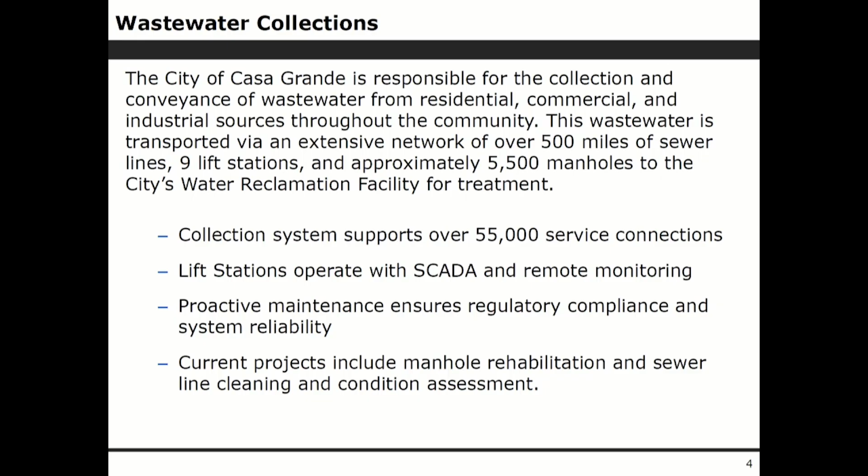Our wastewater treatment plant, as it currently lies, is 18 million gallons a day. We are just completing a conversion—we were at 12 million gallon a day capacity. We're going to be finished in the fourth quarter of this year with our expansion to 18 million gallons a day capacity. And we have a future capacity of over 50 million gallons a day at that location if we choose to continue to treat in a centralized location for Casa Grande.

We do have other opportunities, and we evaluate that on an ongoing basis. In 2024, we treated over 2 billion gallons of waste that came in from our residents and our industrial users, and again, we produce that A+ quality effluent.

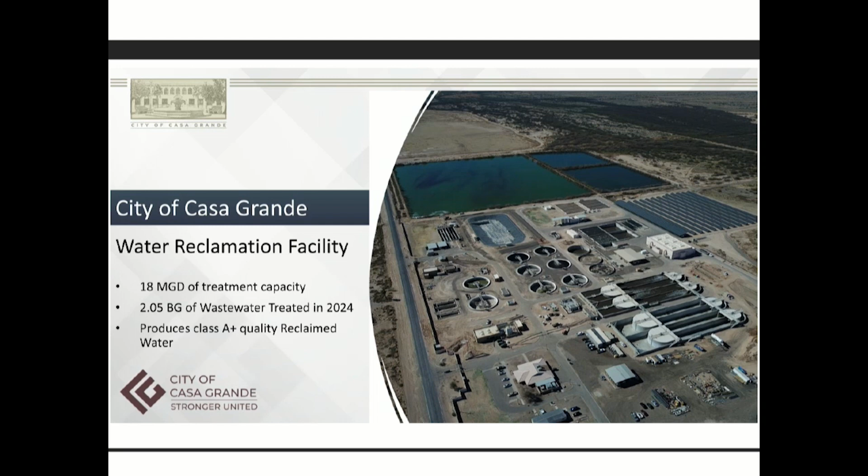We have 12 certified operators through the Arizona Department of Environmental Quality that work at our plant. Two of those are grade 4, the highest grade you can get for certification. And if anybody knows anything about the wastewater industry, finding talented people is very difficult, so we have to really grow from within. So when our maintenance workers come on board, you can see how many of them have their grade 1 certifications, then 2, then 3, and then ultimately 4.

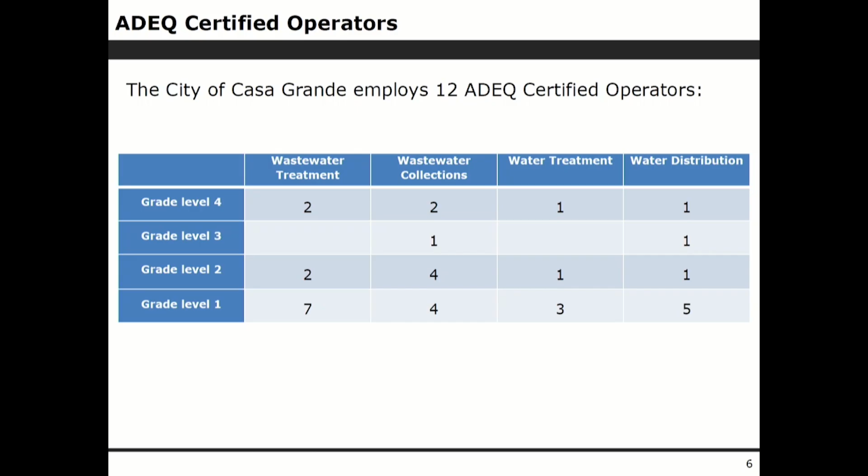So if kids ever thought about what they want to do for a living, if they can get over the stigma of wastewater, it's a great place to grow your career very quickly if you can get through that certification program. When we go out to the schools, we try to promote that as much as we can. But it's difficult to find certified operators—we're very, very fortunate to have the level of operators that we have in Casa Grande.

Then our treatment process. Our preliminary treatment is basically to get any of the difficult debris out of that waste stream. If you have a swimming pool and you picture a rock going into your filter, you can imagine what that's going to do to your impeller. So now imagine all the waste that anybody can send to us, what that can do to our systems in our wastewater treatment plants. So the first thing is to screen that debris out so that we don't have to treat it and it doesn't impact our pumps in a negative way.

And then our secondary treatment is our biological treatment process—our aeration or oxidation ditches. That's where we introduce our micro-environment that we've created, basically our bugs that digest all the nutrients in our waste stream. If you've ever seen our aeration ditches, when I give tours to kids or the folks that come out to our wastewater plant, it's like Willy Wonka's chocolate factory river. That's the process where the bugs work, and we start to digest that waste and get it to a place where we can then treat it through the rest of the process.

Our next process is our clarifiers, and that's where we separate the liquids from the solids. Effluent is the liquid portion of that waste stream. The solids go in their direction, and I'll talk a little bit about how we process those in just a bit. But those liquids are what turns into our treated effluent.

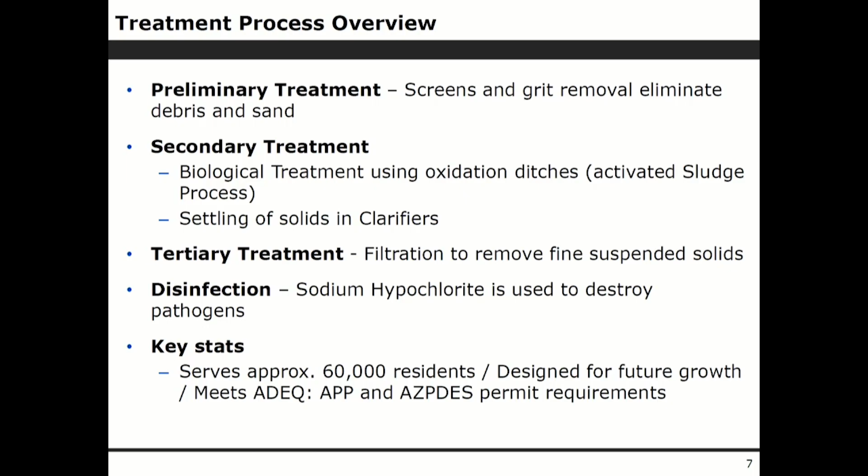Kevin, can I ask a quick question? Absolutely. How often does the state come and do inspections?

Don't they monitor your operation on some kind of regular basis? The best way I can answer that is whenever they want. But we do have regularly scheduled inspections where they come out and look at our daily reports and things like that. But they can come out anytime they want and take a look at our process, and we encourage them to. We like to think we're the flagship of wastewater treatment. I'm sure there are better plants out there in the world, but we do a really good job of maintaining our plant and ensuring we are right where we need to be for regulatory compliance. Yes, heavily inspected and heavily regulated. Thank you. Probably too much, but we really don't have that choice.

This diagram gives a line graph of our different treatment process. The upper process is the liquids, where we basically go through that secondary clarifier where it separates liquids from the solids. We go through that filtration process, then into that chlorine or chlorination basin, disinfection basin, and then we dechlorinate, and then we discharge.

Our solids go through a similar process where we further digest that waste to a point where there's nothing that's going to impact the environment when we get rid of those solids. We currently use that biosolids product, our solids, at our landfill as an alternative daily cover, which is also regulated by Arizona Department of Environmental Quality. So we have a permit to use that solids material out there, and we mix it at a 2-to-1 ratio with topsoil. Landfills are required to have 6 inches of cover every day, and that's a very expensive process, so being able to use this product out there at a beneficial use really helps us reduce the cost to the city and our residents.

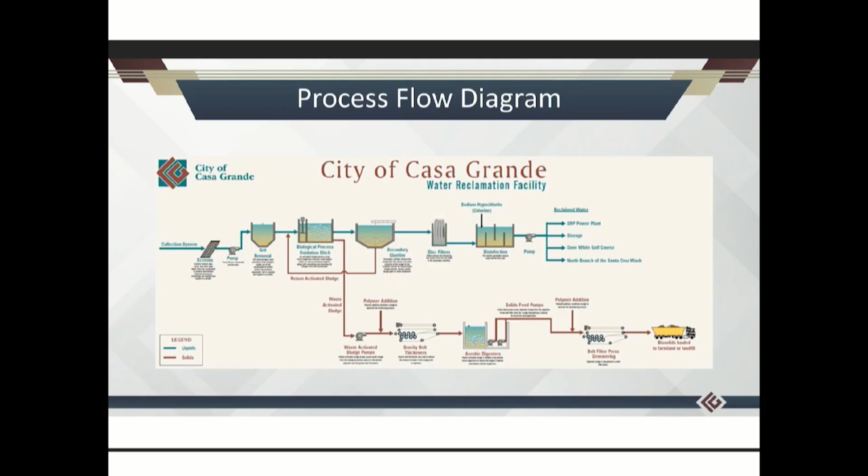Excuse me, ask you a question. Sure. So, because you're talking about the solids, does it work similar to the digester process like they use for dairy cattle? Yes, very, we introduce air to that system. It helps break it down and get rid of the nutrients that are negatively impactful on the environment. So once we get to a point and we test and meet those requirements, then we're able to use it at our landfill.

There's also a lot of other ways you can use that solids material. You can land apply it for fertilizer and things like that, but we currently don't do that. As you say, from a digester, it comes out as just plain dirt that really doesn't have anything. They use it for bedding for the cattle and they do all this stuff, but it really isn't good for topsoil because everything's been removed from it. Correct, it's pretty inert at that point. Okay, thank you.

So our Phase 4A expansion, which will be finished in this fourth quarter of this year, we spent just over $32 million in that plant expansion, and that gets us from 12 million gallons a day to 18 million gallons a day. We've also expanded our solids handling capability with this step and improved our odor control.

Our Phase 4B, which is under design right now, is where we'll be introducing UV disinfection to our process, as well as putting odor control throughout our entire plant. But we're really trying to create redundancy in the process that we have and replace some of our older equipment so that we're more modernized and ready for that next growth spurt whenever that happens, but sure it hasn't slowed down of late. So we're continuing to grow in Casa Grande.

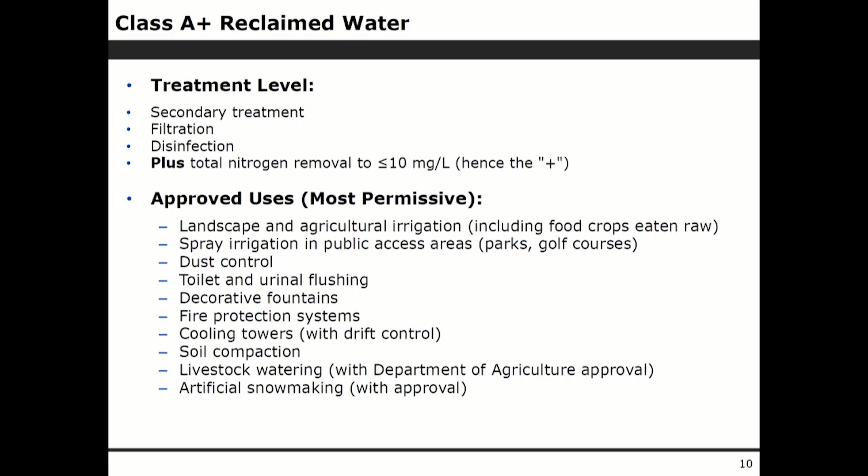We also send it to SRP's Desert Basin power generation plant. They use it in their cooling towers. And then most of our effluent gets discharged to the north branch of the Santa Cruz, and I'll go over that right now. So that is what's called our managed recharge facility.

Now there's two types of recharge facilities. There's a managed recharge facility which you take advantage of a natural waterway to discharge your effluent into and then allow that to percolate into the ground and further get beneficial treatment through the ground process. We have a 5.8 mile long managed facility in the north branch of the Santa Cruz, and I'll show you a picture of that here in just a second. We're able to recharge 3,500 acre feet of water each year.

Now, we don't achieve that today because anytime it rains and there is water introduced into that system, we get zero credit for what we discharge. So anytime we have a monsoon, or in some cases, in our area, it's the San Carlos Irrigation District, they have points along their distribution system where they're able to discharge their water, and that goes into the north branch of the Santa Cruz. So anytime their flows have been introduced to ours, we get zero credit for that. So we have the capability of recharging 3,500 acre feet, but we don't achieve that because of other influences.

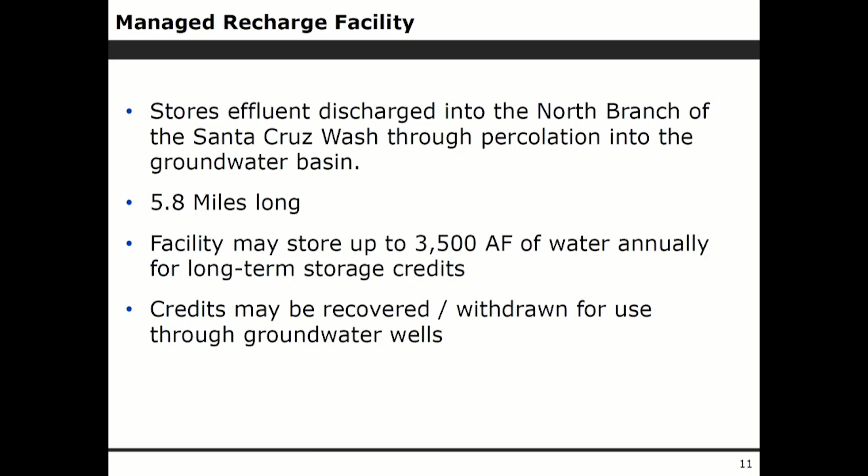Yeah, sure. Go ahead. I'm sorry, Kevin.

When you backed up two slides, you're saying where you pump it to the golf course, to the toilets, to all this. So you have to have a separate line running into those places. I'm looking at like fire protection systems. So like my home is covered. I have fire sprinklers in my house, which flooded one day. It was real fun, but a whole nother problem. But that comes just from the main line. And so, if you had fire protection systems in, say, industrial parks, right, would you have a separate line running to that industrial park? So then in that case, building code in the city, would you have the provision to say, well, okay, this industrial park or this area has to have a separate line for effluent water to come and service all these areas? Yeah, I think it's commonly called purple pipe.

The purple pipe, I get it, right. But I'm just wondering, do you have that provision in your city codes?

We don't have it as a city code, but we have the system in place. We just finished about an 8-mile long effluent delivery line into our industrial area. It's also an opportunity for us to have an alternative discharge point in the main branch of the Santa Cruz, but that line was developed to deliver effluent to our industrial users. And it is in place today.

We're currently upgrading our effluent pumps to feed that system, and we're going through the process of negotiating with some of our industries the deal that we're going to make with them so that they can take advantage of using that treated effluent for cooling towers, fire protection, or any other use that is permitted. And that way it doesn't impact the potable water use of those industries and really helps with the drinking water situation in our area.

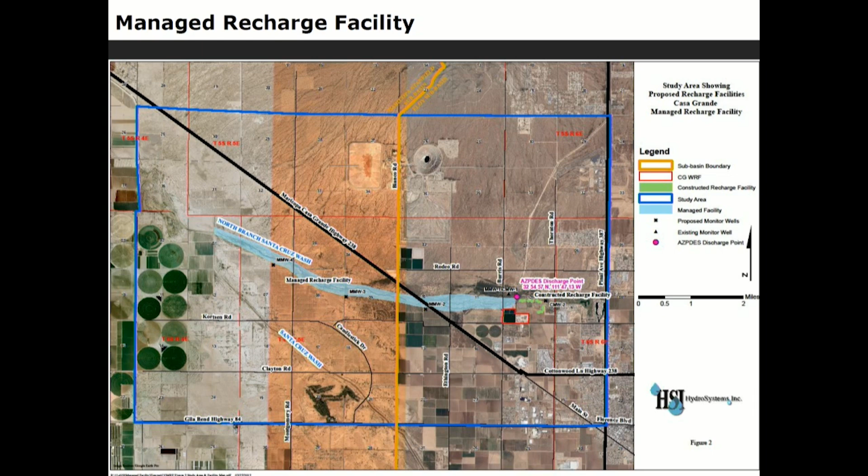Part of our permit requires us to test the groundwater in that area, so we were required to build 4 groundwater monitoring wells. It's hard to see in this picture, but they're up there, and we have to sample from those wells, test the water, and provide reports to make sure we're maintaining our permit requirements. We do that on an annual basis.

Let's see here. The last slide here is soil aquifer treatment. This happens when it rains, when we discharge our effluent, when any water hits the ground. That water is absorbed and goes through a beneficial treatment process in the natural environment. So even though we've treated our effluent to a point that's safe to discharge, as it percolates through that system, it gets cleaner as it goes deeper through the ground. That's how it's worked forever, and that's how it's going to continue to work.

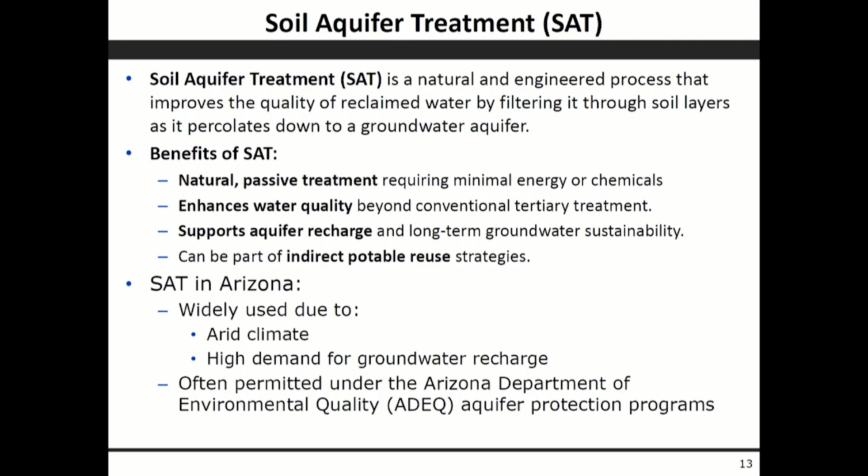But we take great pride in meeting our permit requirements. We don't have to treat to an A+ standard, but we do that for a reason — because we want to take advantage of every drop of water, especially here in Arizona where water is gold and is the future, and we need to maintain that resource. So that's the end of my presentation. Happy to answer any additional questions.

Any questions for Kevin? Steve, yes, Jeff. On one of your charts, and the purpose of this whole meeting is to put people at ease, it said it could be used for watering livestock with USDA approval. Explain how that would happen, because with effluent that goes into an urban lake, is it really safe for animals?

Yeah, and actually the one up there includes irrigating food crops that can be eaten raw. So each of those reuses has to be permitted, and each one is reviewed. If a farmer wanted to use it for agricultural use, we would go through a permit process to get that approved. They would have to have a permit, and we have to have a permit to deliver it. So it's all looked at every time we make any changes to how we use that effluent.

So if you have a backyard garden with heads of lettuce and you spray it with this water, it would technically be safe to eat still. I'm not going to sit up here and drink a glass of treated effluent just because I know how great Arizona Water treats their water — I'd prefer to drink theirs than that — but it is totally safe. Okay, thank you.

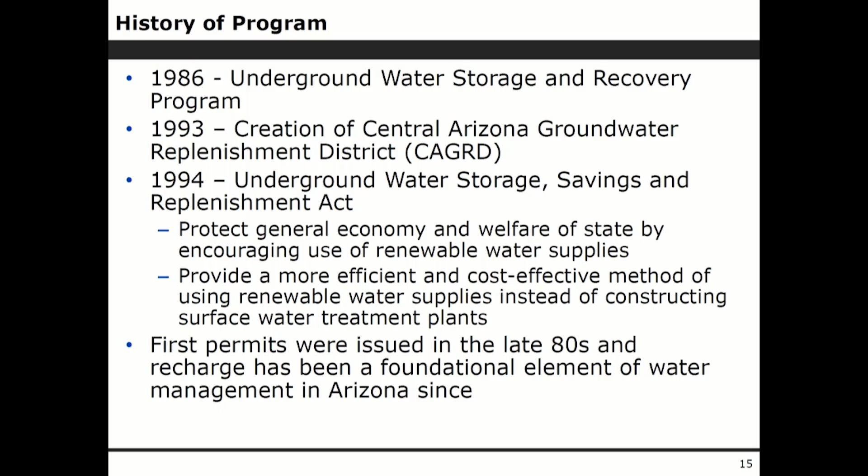Before I talk too much about the program, I want to give you a feel for the complicated nature of groundwater in the Pinal AMA, or in Pinal County. Some people think of Pinal County as being entirely encompassed within the Pinal AMA, but that is not the case. There are 3 active management areas in Pinal County.

Arizona Water Company serves 3 primary water systems within Pinal County. There's what we call the Superstition system, which includes Apache Junction, Gold Canyon, and Superior. Down in the southeast, we have our Falcon Valley water system, which includes Saddlebrook Ranch, Oracle, and San Manuel.

So in addition to the active management areas, there are several smaller basins outside the active management areas located in Pinal, including Donnelly Wash, the Lower San Pedro, Dripping Springs, and also the Salt River. So there are 7 groundwater basins within Pinal County, which makes for a more interesting water management picture.

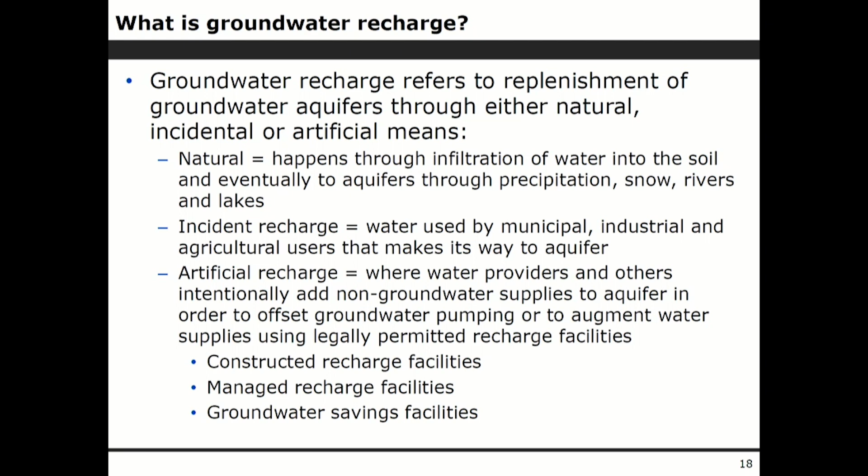The final way to replenish the aquifer is through artificial recharge. This is where a water provider or others intentionally add a non-groundwater supply to the aquifer in order to offset groundwater pumping and augment water supplies for the future. They do that through legally permitted recharge facilities. Kevin mentioned that the city of Casa Grande has a managed recharge facility - that's one type, and I'll talk more about those in a minute.

Let's talk about replenishment for a minute. Replenishment is the function of replacing groundwater pumping considered to be in excess of sustainable levels. It's conducted through artificial recharge facilities that are legally permitted - the same facilities we'll talk about shortly.

The difference between replenishment and recharge is that replenishment happens after the groundwater pumping has occurred. The other difference is that responsibility for replenishment currently lies solely with the Central Arizona Groundwater Replenishment District - no other entity has that responsibility. Everyone else would be recharging it, which you'd do in advance of recovering those credits.

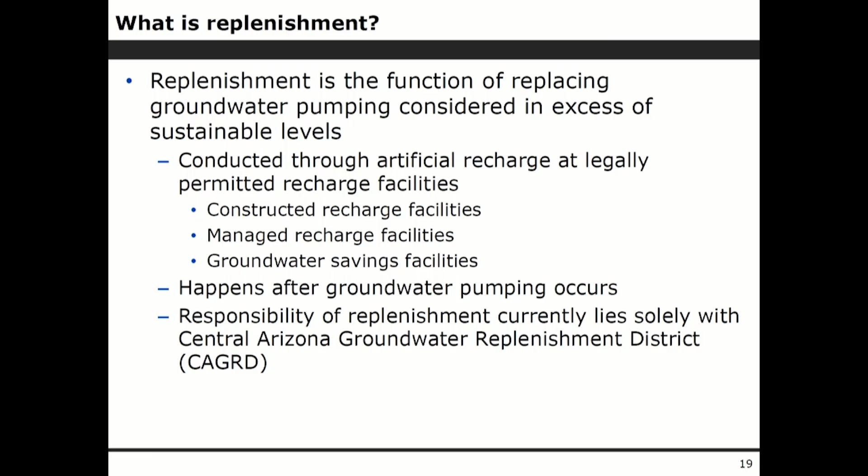The legal sources of water for recharge or replenishment are basically any water supply that is not a groundwater supply. In Arizona, we're typically looking at Central Arizona Project water, Colorado River water, surface water like Gila River water or water from Queen Creek, and effluent. Effluent is the only supply that requires an aquifer protection permit, an additional level of regulation that Kevin referred to.

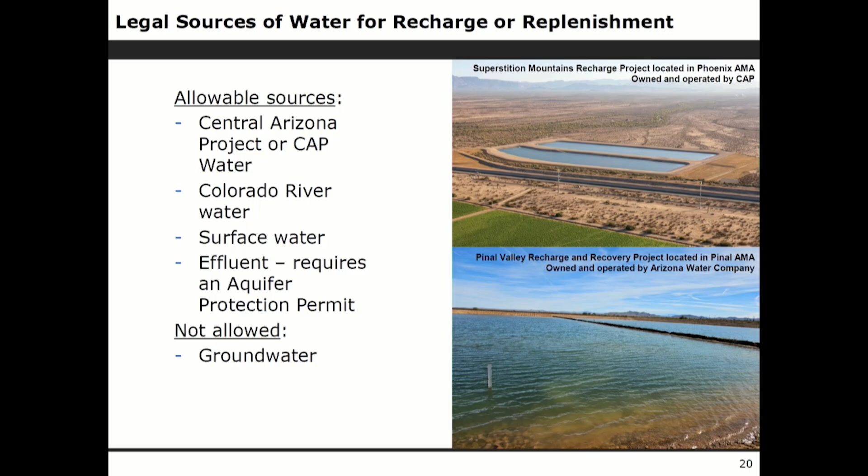Let's talk about the different types of permits. I mentioned earlier that the program was revamped in 1994. When that was done, all of these different permits were created, so you cannot operate a recharge project in Arizona without them in place. You need an underground storage facility permit or a groundwater savings facility permit, depending on the type of facility you want to operate - you have to have a facility permit.

There are two types of underground storage facility permits: a constructed facility and a managed facility. Casa Grande's facility is a managed facility. Of the 12 constructed facilities in the Pinal AMA, 2 store CAP water and 10 store effluent. Of the managed facilities, there are 3 in the Pinal AMA - 1 stores CAP water, and 2 store effluent. There are also groundwater savings facility permits, which I'll talk more about in a moment. There are 4 in the Pinal AMA, 3 of which store CAP water and 1 stores effluent.

Anyone can store water at a legally permitted storage facility in Arizona, but they are required to acquire a water storage permit. Whether or not you own the facility is irrelevant - even if you own it, you still need a water storage permit. There are 50 such permits in the Pinal AMA. Whether you store or recover that water in a single year, or store it long-term for a future shortage, you still have to have that permit.

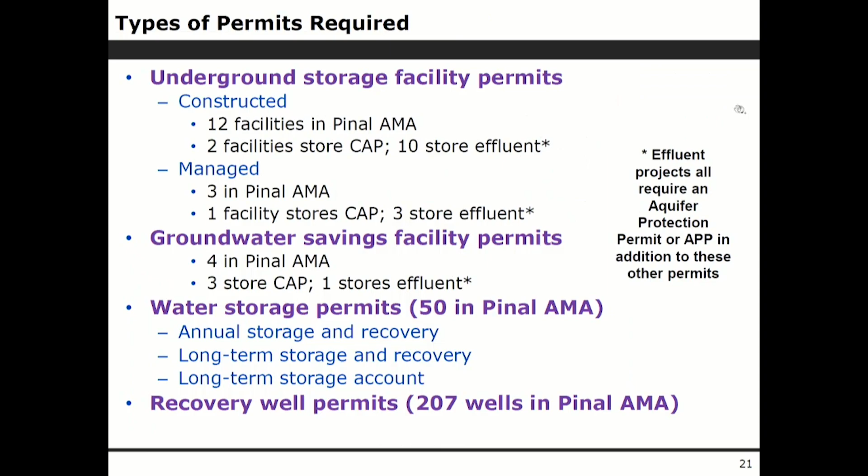Real quick question - we were talking about the two projects, one was holding water, the two ponds you were showing on the side, those recharge ponds. How do they recharge? Is that percolation? Yes, these just percolate.

I wanted to mention that I brought my recharge hydrologist with me, Mr. Dick Thompson - this is his encore career. He is our recharge hydrologist. He spent most of his time with the city of Tucson operating their recharge program, which is quite extensive.

So those are pretty large projects. How long does it take that water to get down - how deep is the water table, how long does it take the water to get there? How long does it take those ponds, how often are they recharged? Are you maintaining a constant level? Are you having to pump it? I'm just curious because of evaporation and the fact that it doesn't really go too far into the ground.

Yeah, I'm just curious. Thank you. I went to the ribbon cutting of that facility, the day they turned water into it the first time. Anyway, cool. Go ahead.

So I'm just curious, because we see it's a recharge pond, and it's percolating at a certain rate. So it goes down, some more water comes in - how do you balance that? Maybe that's kind of an open question.

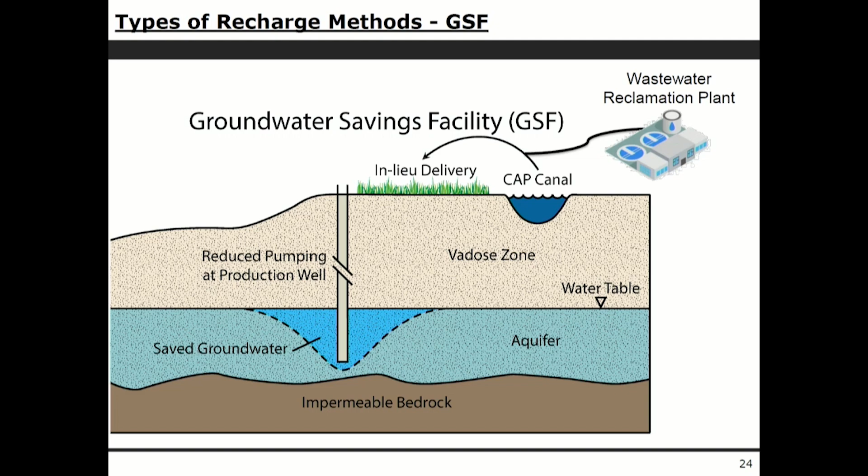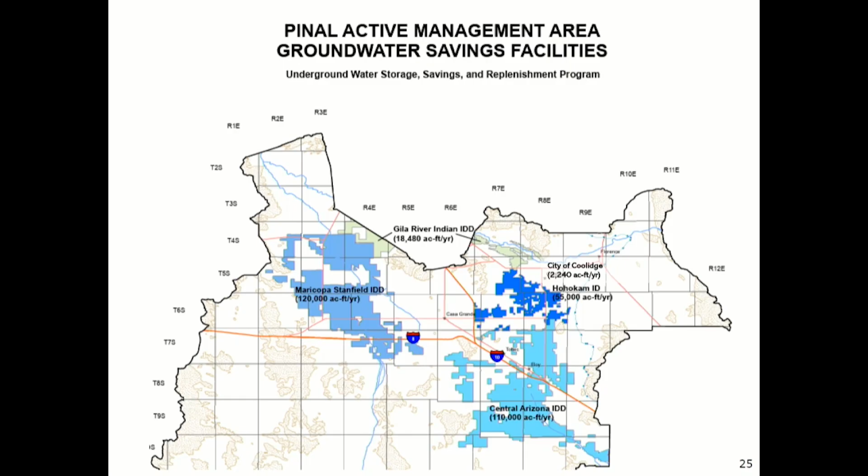And this is the location of the groundwater savings facilities in the Pinal AMA. So I will just add about this is that there is not one type of facility that is better than another. These are just two different methods, and depending on your situation, one facility might work better than another, or a combination of facilities.

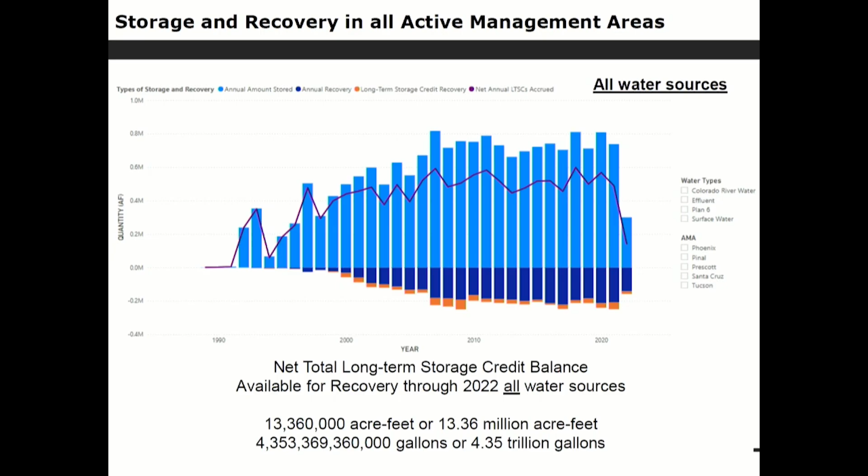So let's just kind of talk for a few minutes about how much this tool is being used. I talked about back in the 80s and the 90s when we passed that program, so we've been storing water in the ground for a long time. This graphic represents all the water that's been stored in the active management areas since the inception of the program. That's 13.36 million acre feet, over 4 trillion gallons. To give you a perspective, Arizona Water Company today uses about 20,000 acre feet a year of water. This would be a supply that would last us 668 years.

Now let's take a look at effluent. Again, this is all effluent that's been stored in all of the active management areas since the inception of the program. So 1.45 million acre feet of effluent has been stored. That's about 472 billion gallons. That is roughly 11% of all the water that's been stored since the inception of the program. And that's in all the AMAs.

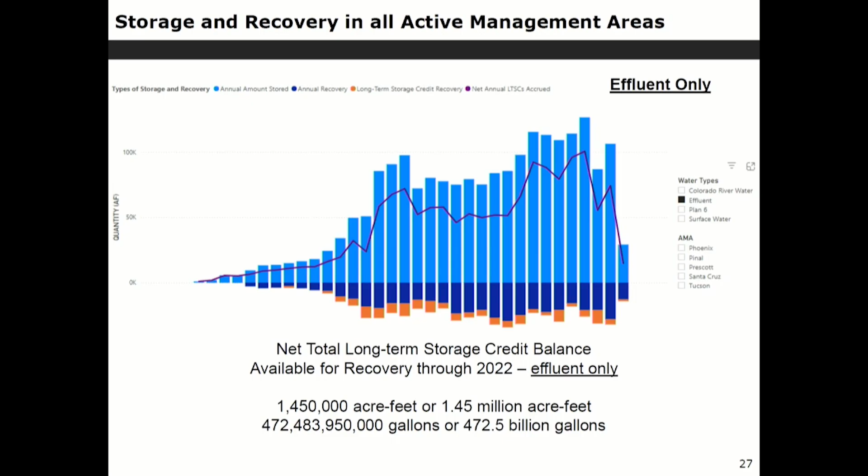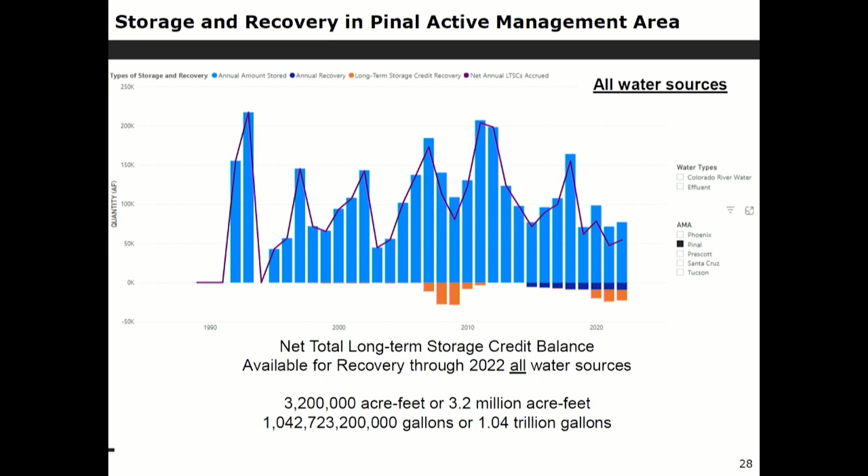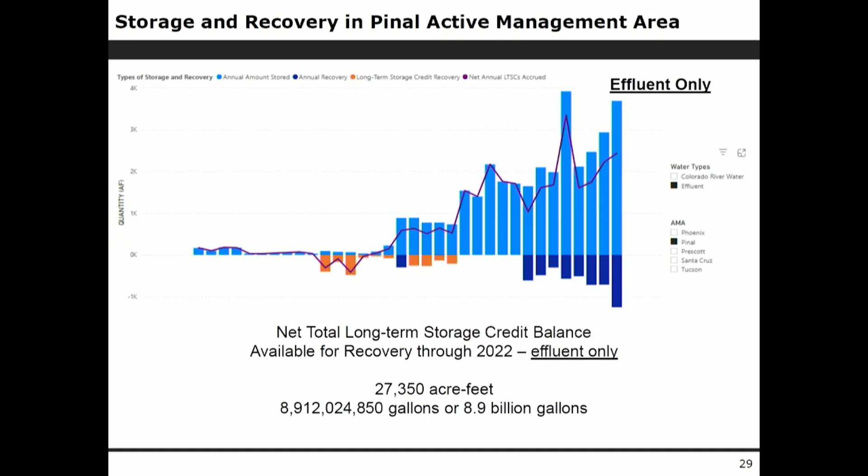Now let's take a quick look at what's going on in Pinal. By the way, this data is through 2022, so 2023 and 2024 are not included. So in the Pinal AMA, of all the water sources, there's been about 3.2 million acre feet of water stored. That's about 1 trillion gallons, and that's all water sources. Of effluent, there's been about 27,350 acre feet, or 8.9 billion gallons. That is not even 1% of the total water that's been stored in the Pinal AMA. So storage in the Pinal AMA has by far been through CAP water.

So let me talk just a little bit about our recharge program. We consider recharge to be an extremely important part of our water management strategy. We are currently storing at 3 groundwater savings facilities. We've been doing this since 2015. And those facilities are those 3 irrigation districts that we're all familiar with.

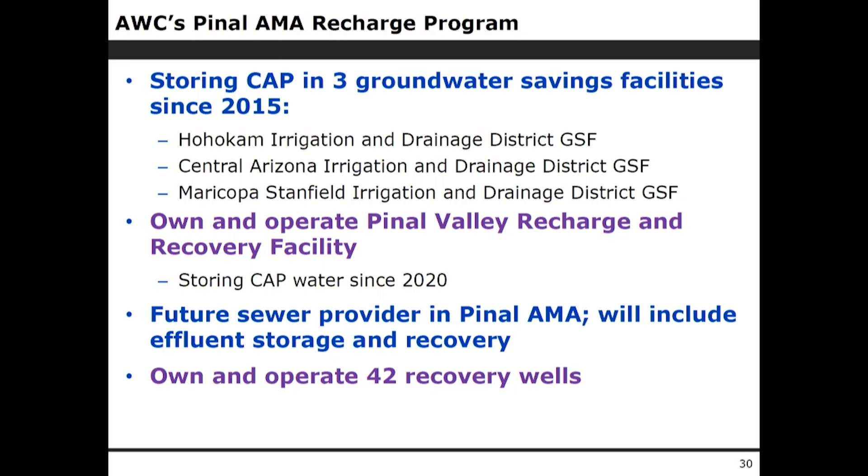We own and operate the Pinal Valley Recharge and Recovery Facility. We've been operating it since 2020, and Mr. Thompson is our recharge hydrologist, and he's very good at what he does. In the future, we'll become a sewer provider in the Pinal AMA, and we will absolutely include effluent storage and recovery. And then we own and operate 42 recovery wells that we use to pull that water out of the ground each year.

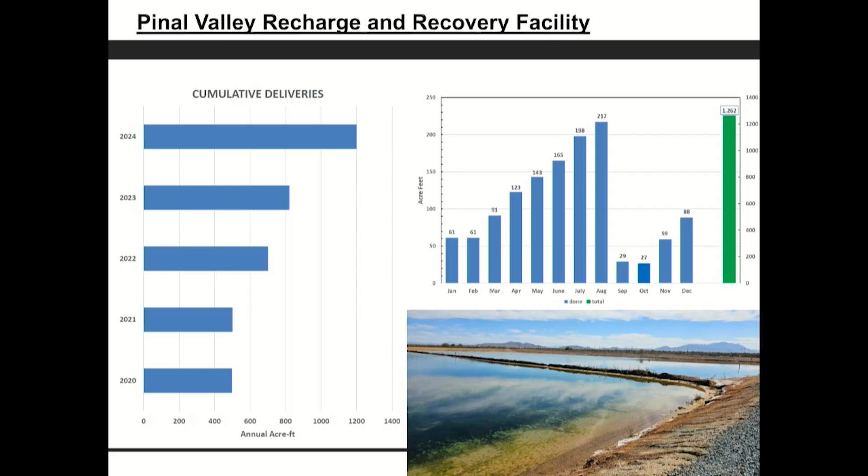So here's just a quick picture of Mr. Thompson's recharge project. Last year, we stored about 1,300 acre feet. We started storing in 2020. This year, we'll store 1,600 acre feet. And next year, I hope that we push up to 2,000, and we'll be operating this facility at its optimal levels.

So last, what I want to do is talk about our water resource strategy and how some of this stuff all fits together. At Arizona Water Company, we have two water resource strategies. One is to secure and maintain a diverse water supply portfolio, and two is to promote the efficient use of all the water supplies that we have.

I'm going to start with the second one first, since I'll talk more in depth about the first one later. When I say we promote the efficient use of all water supplies, I mean every single person, every single entity, including Arizona Water Company, the city, the county—we all are going to use our water efficiently. It doesn't matter whether the customer arrived 100 years ago or isn't going to arrive for 10 years.

Anybody who lives here is going to use their water supply efficiently, and it doesn't matter the type of use. It doesn't matter if it's a golf course, a home, a cow, the landscape watering you brought up, Lucid Motors, or the Wendy's. Everyone is going to use water efficiently.

And it does not matter the supply source. We don't care if it's CAP water, effluent, or groundwater—in fact, those supplies are all commingled together. It doesn't matter. We live in a desert, and we're going to use every drop of water we have as efficiently as possible. So that's one piece of it.

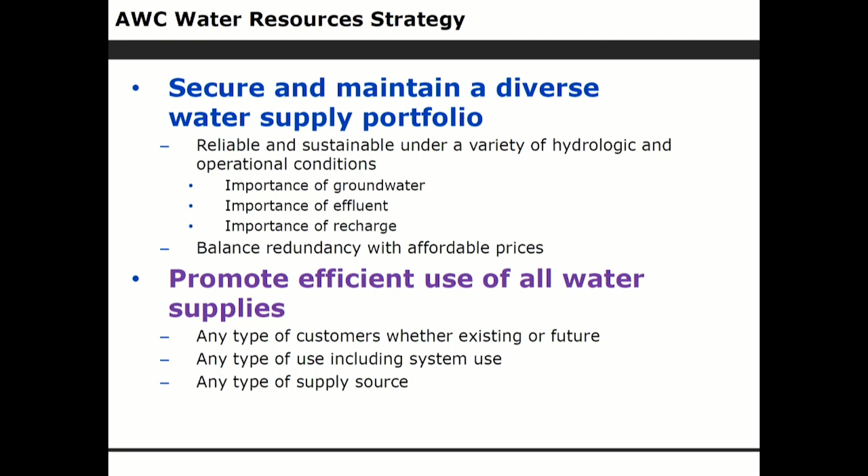If you'll humor me for a moment—if you looked at water resources the way you would your retirement portfolio, you'd start to understand how this works. For example, your 401k is essentially the groundwater that we have. You have a certain amount of money in your 401k, and it's not limitless, so you have to figure out how to make that last over your entire lifespan. One day I hope to have Social Security, and that's going to come in every single month—that's like a renewable water supply.

Maybe I have an annuity somewhere, maybe a pension—those come in on a monthly basis. So I need to manage my groundwater supply, I need to manage my 401k to last throughout my life. I do that by using my renewable supplies, and then maybe I go out and get a job and recharge my account, put a little more money in it—maybe a part-time gig, something like that. The way you manage your water portfolio is essentially the same way we manage our water supply.

I think I'm going to stop there, because my job is to pass the mantle off to David Dunaway, who's going to describe, once the water's recovered, what he does to make sure it meets drinking water standards.

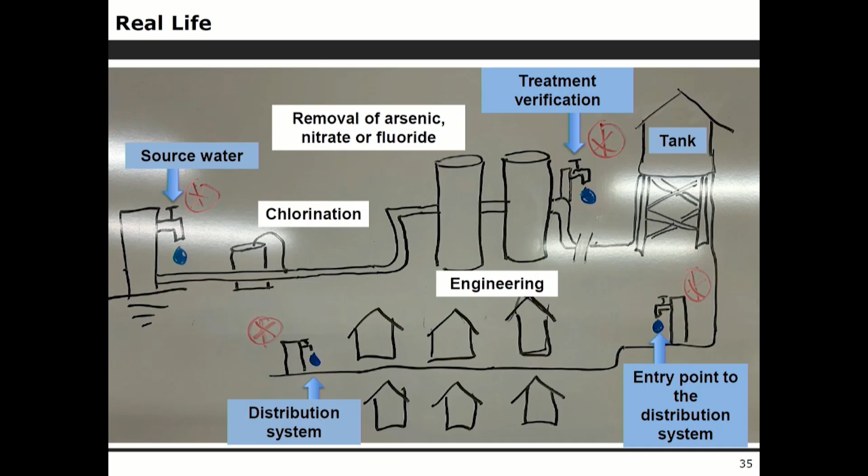Once every 3 years, the friendly folks at ADEQ do pay us a visit. I can echo Kevin's sentiment of they show up as frequently as they like, but no less than once every 3 years.

When I was talking about sampling in a number of locations, oh boy, there's a lot of sampling. The state and federal government in the Pinal Valley system every year would like us to take 938 samples, and that's a lot just by itself. But we don't stop there. At Arizona Water Company, we're taking over 3 times the number of operational samples that we hold ourselves to make sure that we are serving safe drinking water above and beyond what the government wants us to. And in a case where there's a 0 for treatment verification and a 0 for tank samples, despite thousands of pages of regulation, we're taking samples in places the government didn't really ask us to, just to make sure the water is safe and we understand it from start to finish.

Before I started at Arizona Water Company, and what sold me on working here, despite a claim of job hopping, was it was described as compliance is not an option. It's a drop-dead requirement. As a former regulator, somebody who's worked in water a long time, that was music to my ears. After decades of working in water and public health, there's just compliance down here, and then there's where we are.

Now, these water samples are sent to state-certified labs, again, with their own body of regulation. We are very lucky in Arizona to have really good ones here. But even then, for a handful of the really complicated tests with stuff I don't want to pronounce in a public venue, we have to ship those samples out to California and Ohio because there's so little specialized equipment needed to detect down to these super, super tiny levels that we need to for compliance, or above compliance in our case.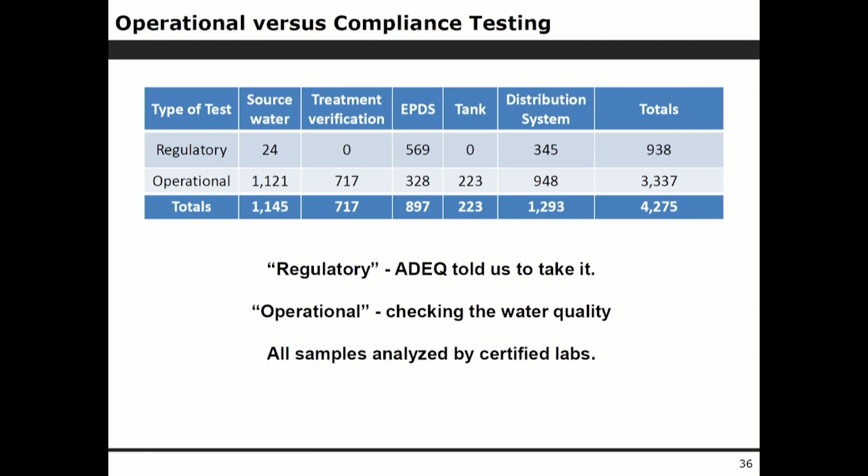But who takes those samples and who runs those plants? Trained and certified experts. Out of 295 Arizona Water employees overall, across all of our systems and support staff, just about half of us, 135, hold at least one level of certification. 34 of us in Pinal Valley are certified operators, again about half of our 70-plus staff.

Legally speaking, though, you technically only need 2 certified operators, one that holds certifications at the grade of your water system and your distribution system, and one more as a backup. We have many, many more than that.

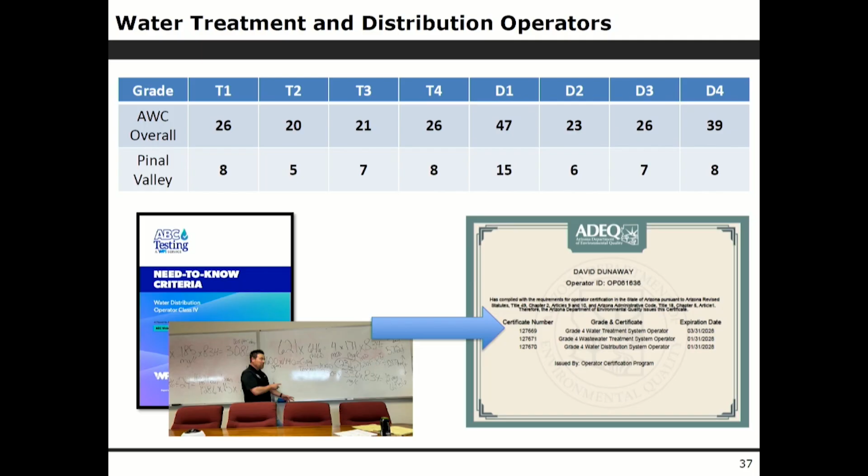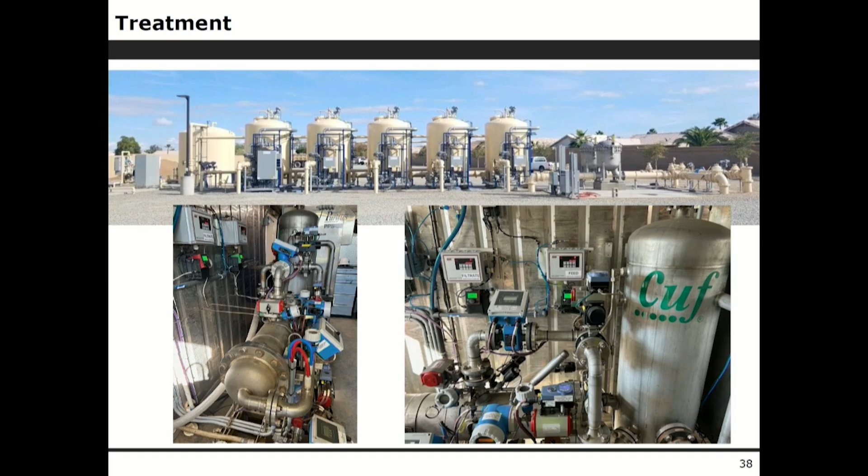Simply stated, treating and delivering safe water so that our customers can turn on the tap is a very detailed and complex process. But I encourage you not to just take my word for it. All water systems are required to publish a consumer confidence report each year where they document the water quality and the sample results.

So I encourage everyone to visit our website, www.azwater.com. The header at the top, look for water quality. Very first on the link there, consumer confidence reports. We are just about to put up 2024's water reports here in the next couple of weeks.

Final thought, on a personal level, I live in Casa Grande within our water system. My kids drink the water. I drink the water. I took this job here in Casa Grande because I believed in the people and I believed in the company. So I am just one resident of Casa Grande, but I believe in what we do, and I put it to the test every day. I'm not going to jeopardize my family. And the same is true for the rest of our leadership team.